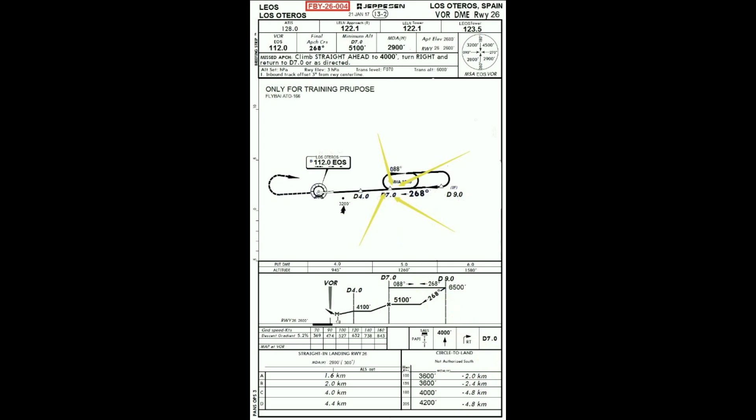This approach depends on how we achieve the initial approach fix via the VOR. We may expect different options about the procedure or what we have to fly on the approach. So let's suppose we are proceeding towards DME 7 to the initial approach fix, proceeding by a radial, let's say north, on heading 180.

In this case, our procedure will be to join on the parallel entry. We turn left outbound for 088, and after a minute we turn left to catch the inbound 268, back to DME 7.

As it is a parallel entry, remember that we have to complete the entry procedure plus at least one lap before we can start our approach.

So after that, we make a right turn on heading 088 for the outbound leg. When we pass DME 7, or where we have wings level, we take time for 1 minute and proceed on the outbound leg. After the minute, we turn right to 268 to catch the inbound leg towards DME 7, and then we can start our approach.

That is the procedure we follow for the parallel entry. If we're cleared by ATC directly to DME 7 and we come in from somewhere else, say radial 090, we don't need to make any holding on the approach, so we can just pass DME 7 and drop automatically to the outbound leg for the approach.

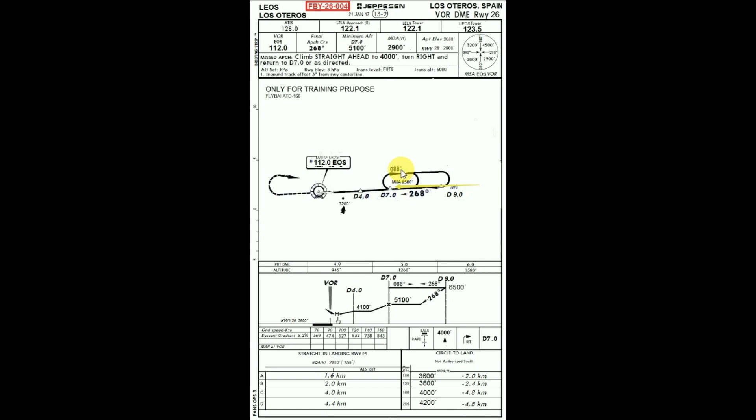So we don't need to require any holding when we are cleared or coming by the sector to the approach, if we're coming by here.

The procedure is a bit different, but it's almost the same as if we're making a teardrop entry. Of course, we are coming by a teardrop sector towards the holding, but we can just continue after the station for 1 minute, and in this case we don't need to make a right turn to catch the inbound leg.

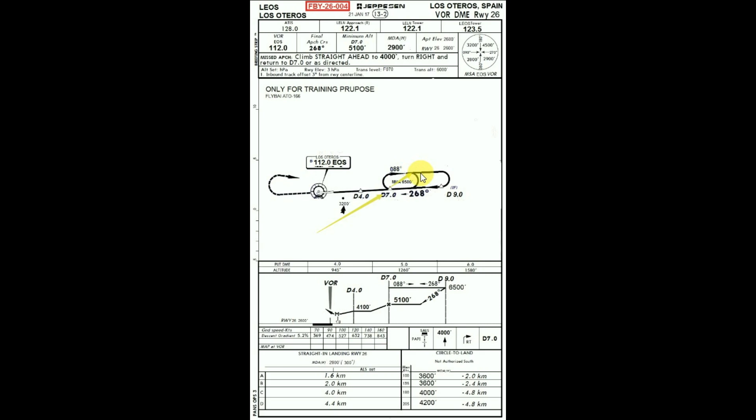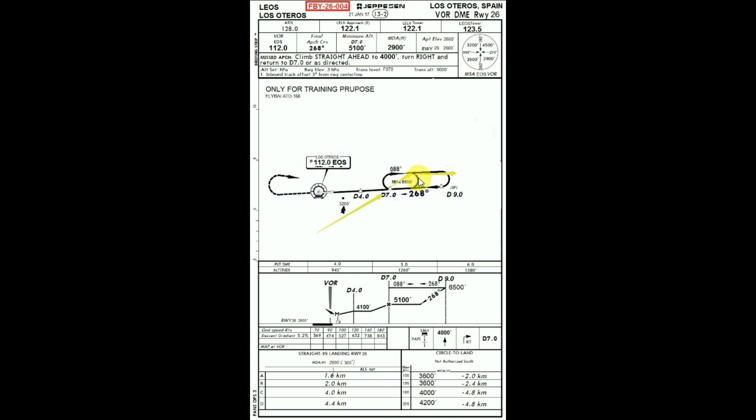Of the holding 268, we can maintain on the right heading 088 to DME 9, and then turn right again back to the intermediate fix for the approach. We don't need to make a teardrop entry back to the station and start the hippodrome again, because we can just drop after a minute when we come in by the teardrop sector.

So let's suppose we come in, as we said before, by radial north. We are making a point to point towards the initial approach fix, and there we go with the chart briefing.

That will be Los Oteros airfield, 21st of January 2017, 13-2, flyby 26-004 VOR DME approach runway 26. We have the approach based on the VOR EOS 112.0. The final approach course will be 268.

The minimum altitude on DME 7, which is our final approach fix, will be 5,100 feet. The minimums for the approach will be 2,900 feet. The airport elevation and airport runway are 2,600 feet.

We come in by the sectors, more or less, so we're going to be between 3,200 and 4,500 feet on the MSA, which is based on the VOR. We come in by here, so let's say 4,500 feet.

So when we're cleared by ATC and ready for the approach, when I come into the initial approach fix, join on a parallel entry, and turn back to the inbound of 268, we need to complete one lap before we can drop.

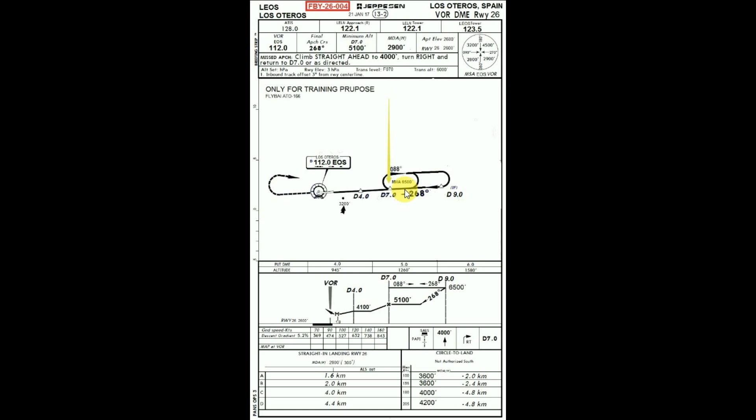So when we're completing the lap on the inbound leg, we're going to complete our before descent checklist. When we pass DME 7, we make a right turn towards 088, and in this case we proceed outbound till DME 9.

I do recommend that when we fly this 088 heading, you have your OBS or HSI radial alive. That will help you so that when you make the right turn towards the final approach fix, you will have almost radial intercept when you finish your turn towards heading 268.

So we will maintain on this leg 6,500 feet, which is our minimum holding altitude, and once we are on DME 9, before turning, we complete our approach checklist, and then make a right turn towards DME 9 to intercept the final approach course 268.

When we pass DME 9, we descend towards our final approach fix at DME 7, descending 1,400 feet in those 2 miles. So it's a very deep descent, approximately 1,000 feet per minute.

And before DME 7, approximately on DME 8, we complete a final checklist, a do-and-read type checklist, which we have to read before DME 7.

When we pass DME 7, we continue descending towards DME 4, from 5,100 feet to 4,100 feet. That's 1,000 feet over 3 miles, 2 minutes, so approximately 500 feet per minute rate of descent.

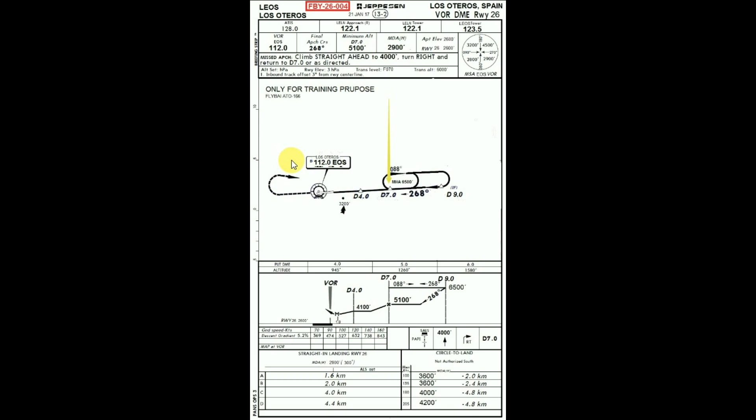Our minimums will be at 2,900 feet, as we said, and in case we don't have the runway in sight, we continue straight ahead to 4,000 feet, then make a right turn towards DME 7, and join again back on the holding.

As we said, we complete the before descent checklist when we're on the holding. When we are on this 088 heading before turning towards the final approach course, we complete our approach checklist. And before DME 7, we complete our final checklist.

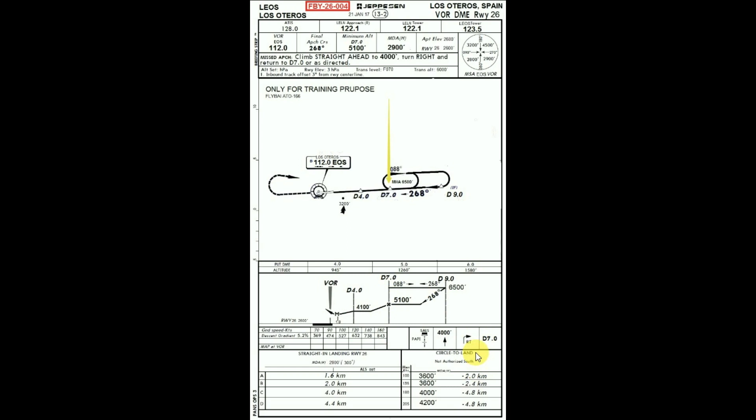Again, when we pass DME 7, we make a small review about the go-around, which is climb straight ahead to 4,000 feet and then right turn towards DME 7.